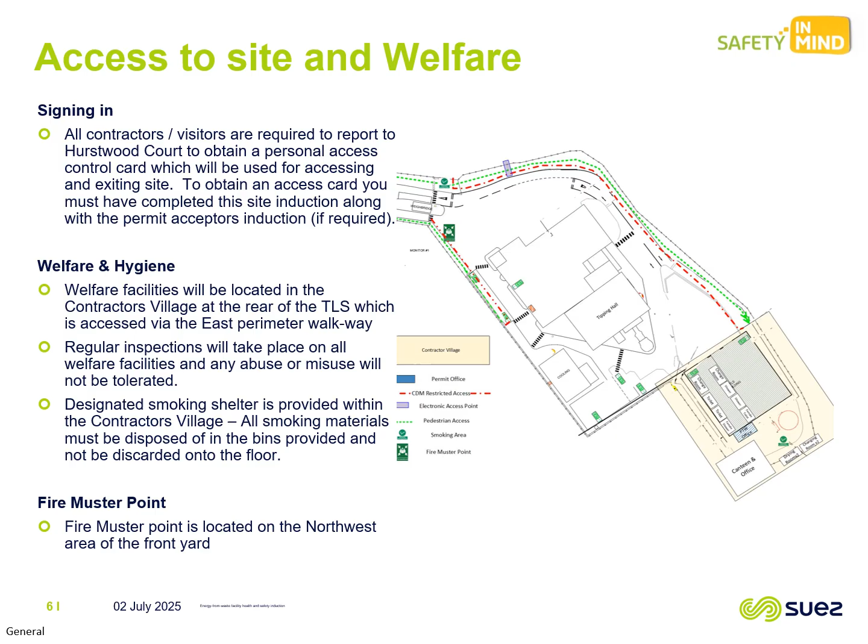Fire muster point. The fire muster point is located at the northwest area of the front yard.

Welfare and hygiene. Toilets can be found in the contractor's village within the TLS. If you need directions, please do not hesitate to ask. Please use the walkways provided. Disabled accessible toilets can be found within the TLS.

Please ensure that you wash your hands in the facilities provided after visiting the plant. Please ensure you wash your hands before eating, drinking or smoking. The containment of litter is of vital importance to protect our environment and control pests. Please use the bins provided around the site.

Driving and parking. Reverse parking is required on site. You must park in marked bays or designated areas as directed by Suez site staff only. All vehicles must display a contact phone number when parked on site. Parking on site is reserved for Suez staff and contractor supervisors only.

Off-site parking. Parking on site during shutdown is restricted. Off-site parking is available at Salford Road, Over Hulton, Bolton, BL5 1DG, where a transfer back and forth from site will be provided.

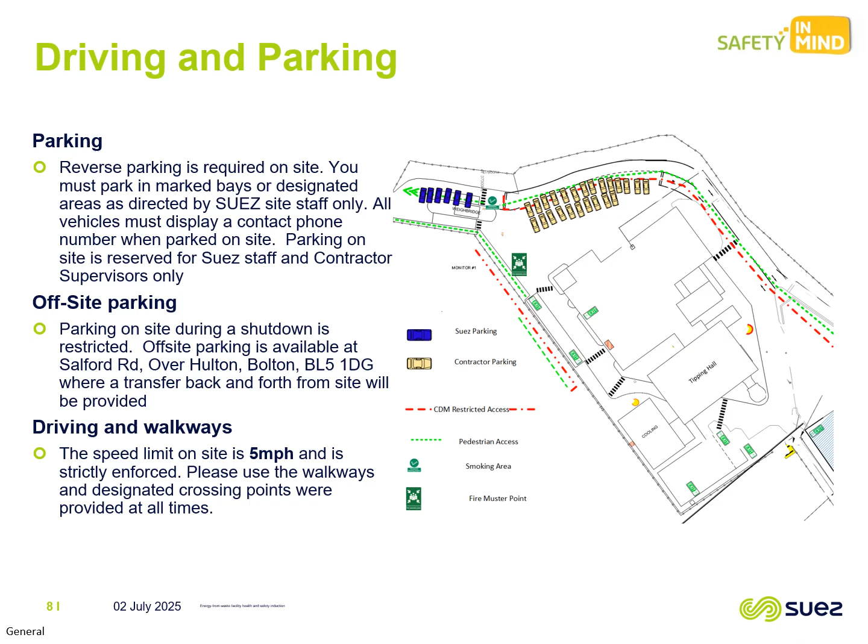Driving and walkways. The speed limit on site is 5 miles per hour and is strictly enforced. Please use the walkways and designated crossing points where provided at all times.

Disability and health conditions. If you are blind or partially sighted, hearing impaired or mobility impaired, please inform reception to make us fully aware. This will enable us to assist you further and ensure that any additional controls required are put in place. If you have health conditions which could affect you whilst on plant, please inform your Suez host. Conditions could include pacemaker, vertigo and joint pain.

Personal protective equipment, or PPE, is required on site or plant once you enter the PPE zone. The minimum PPE required is as follows: hard hat, safety glasses, safety footwear, high-vis vest or jacket, and safety gloves.

Additional personal protective equipment may be required depending on your risk assessment and method statement. All abrasive wheel work requires a full face visor and RPE face mask rated to at least FFP2.

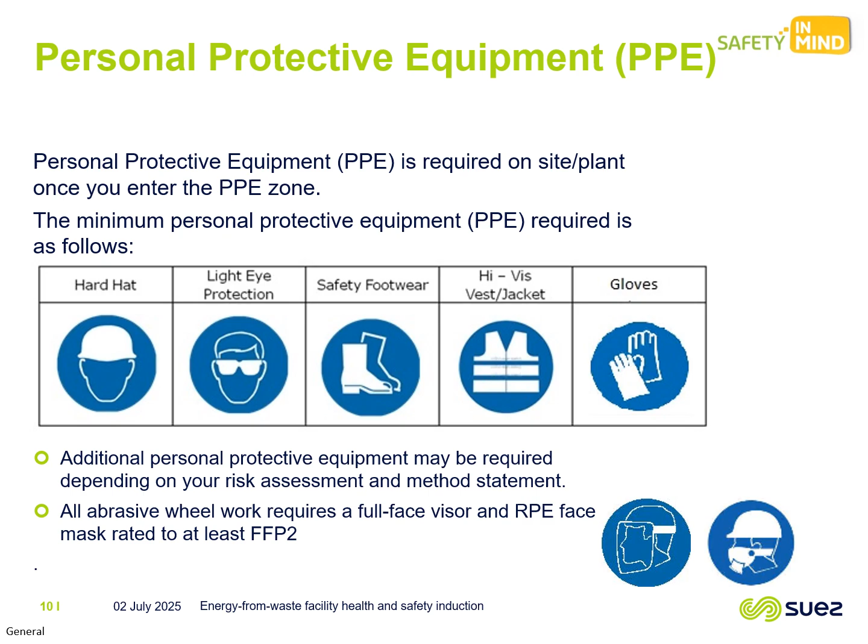Fire procedures. In the event of a fire, raise the alarm by activating the nearest call point. Leave by the nearest safe exit route and walk towards the fire assembly point. Dial 999 or 112.

Fire assembly point: the assembly point for all personnel on site is located adjacent to the bike shed on the front yard. Fire alarm test: at this site, the fire alarm is tested weekly every Thursday at 11 AM.

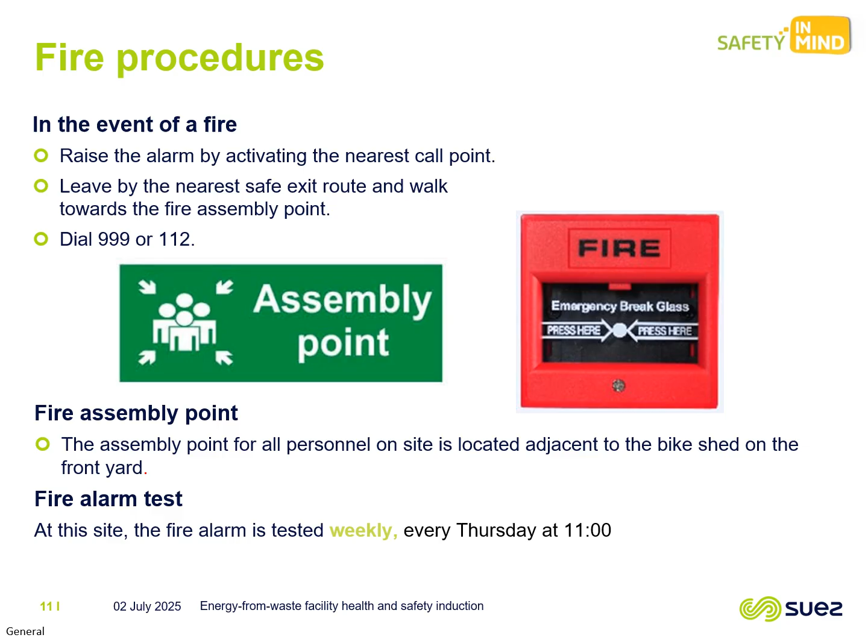Smoking and antisocial behaviour. Smoking is only permitted in the designated areas. The smoking areas are located adjacent to the weighbridge and the contractor's village. E-cigarettes come under the same rules as normal cigarettes, and the smoking area must be used. All smoking materials must be disposed of in the bins provided and not discarded on the floor.

Violence, bullying, drugs and alcohol. We have a strict policy on the use of drugs and alcohol at work. You will be removed from site, and if you are suspected or found to be under the influence, you may not be allowed back. Violence and bullying will not be tolerated.

First aid. This site's first aiders are listed on posters displayed around the facility. Ask a member of staff if you require first aid. Eye wash stations are located around the facility. First aid boxes are available throughout the facility. AED units are in the Permit Office and Hurstwood Court.

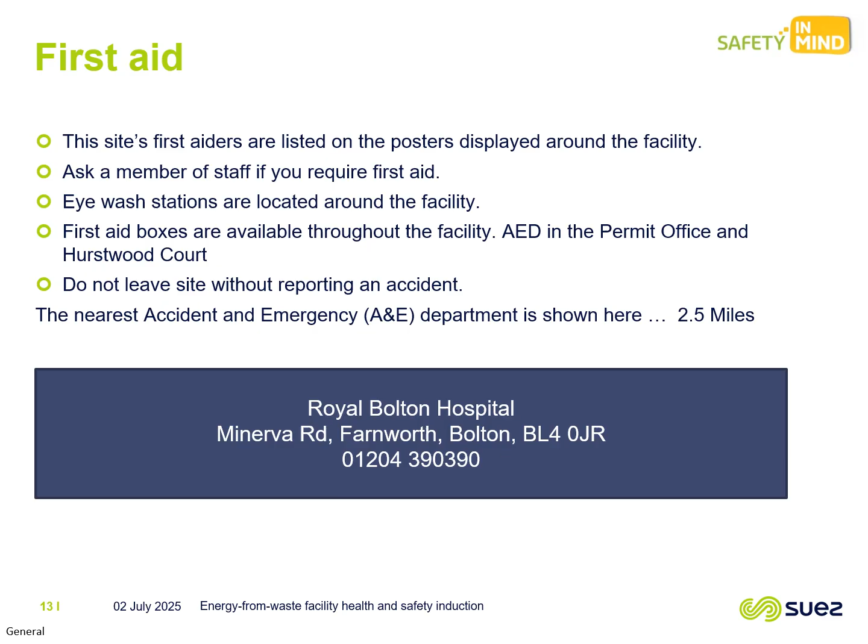Do not leave site without reporting an accident. The nearest accident and emergency A&E department is as shown here, 2.5 miles away: Royal Bolton Hospital, Minerva Road, Farnworth, Bolton, BL4 0JR. 01204 390 390.

Accident reporting. An accident is an unplanned event which resulted in an injury, harm or damage. All accidents and incidents must be reported to an employee on site and recorded in the accident book. Certain events must be reported under RIDDOR, where your full cooperation is required.

A near miss is an incident that did not result in injury or damage but had the potential to do so. We record all near miss incidents, investigate them and put appropriate actions in place to prevent a reoccurrence. Please report all near misses using the forms provided and hand them to an employee on site.

Permit to work. A permit to work is required for all contractor work. Permits are available from the Permit Office located in the contractor's village. Your permit must be displayed or available at your place of work. A permit to work will only be issued when a relevant risk assessment and method statement have been produced.

For certain tasks, certification may be required before a permit is issued. Anyone leaving site without closing out a relevant permit or not abiding by the controls listed on the permit may be issued with an infringement notice. An infringement notice may stop you from working on our sites in the future.

All persons accepting permits on behalf of themselves and their team will be required to undertake an additional permit acceptors induction and questionnaire. When all works are finished, a post-workplace inspection must be carried out before the permit can be completed and signed off.

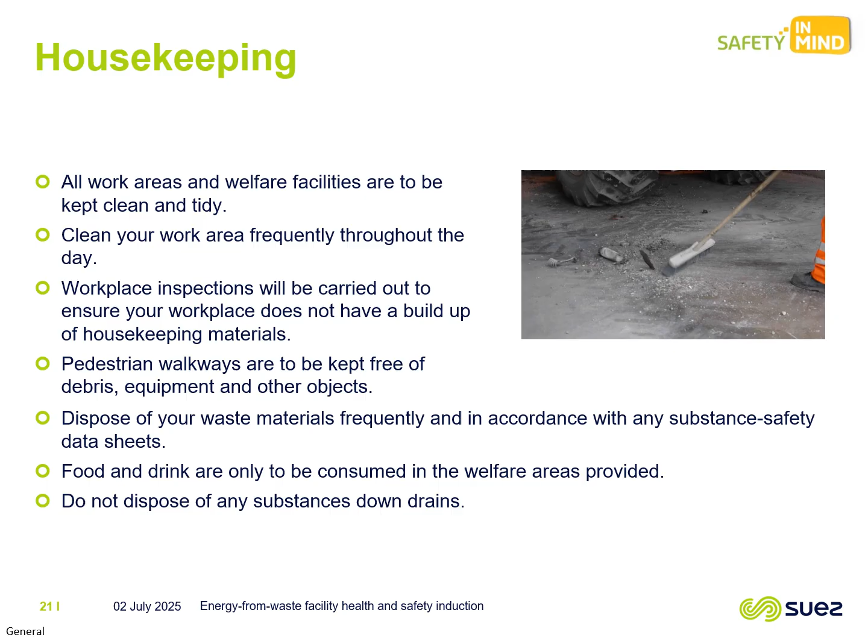Housekeeping. All work areas and welfare facilities are to be kept clean and tidy. Clean your work area frequently and throughout the day. Workplace inspections will be carried out to ensure your workplace does not have a build-up of housekeeping materials. Pedestrian walkways are to be kept free from debris, equipment and other objects. Dispose of your waste materials frequently and in accordance with any substance safety data sheets. Food and drink are only to be consumed in the welfare areas provided. Do not dispose of any substances down drains.

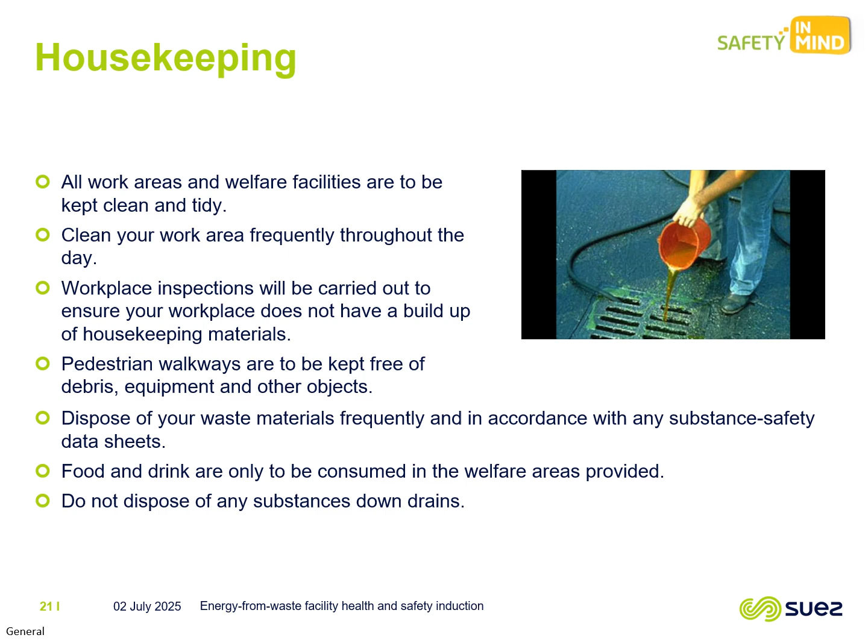Scaffolding. Scaffolding requirements. Please inform the Permit Office of any requirements. Scaffolding modifications are only permitted by qualified and authorised persons. Never take it upon yourself to modify or remove scaffolding.

Scaffold access. When accessing scaffolding, always ensure that there is a valid scaff tag in place. Scaffolding is inspected every 7 days. If there is a do-not-use scaff tag or an out of date tag, report this to the Permit Office and do not use it.

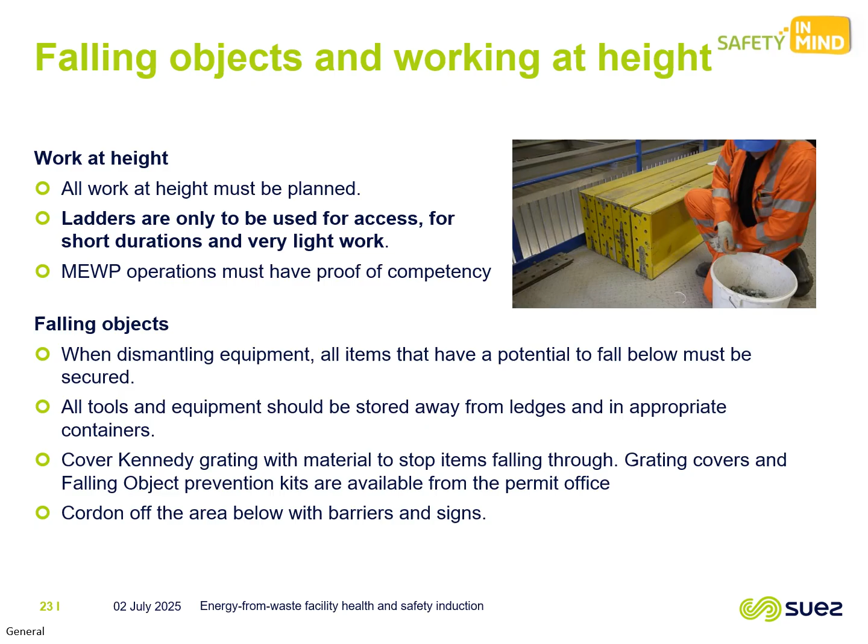Falling objects and working at height. Work at height must be planned. Ladders are only to be used for access for short durations and very light work. MEWP operators must have proof of competency.

Falling objects. When dismantling equipment, all items that have potential to fall below must be secured. All tools and equipment should be stored away from ledges and in appropriate containers. Cover gratings with material to stop items falling through. Grating covers and falling object prevention kits are available from the Permit Office. Cordon off the area below with barriers and signs.

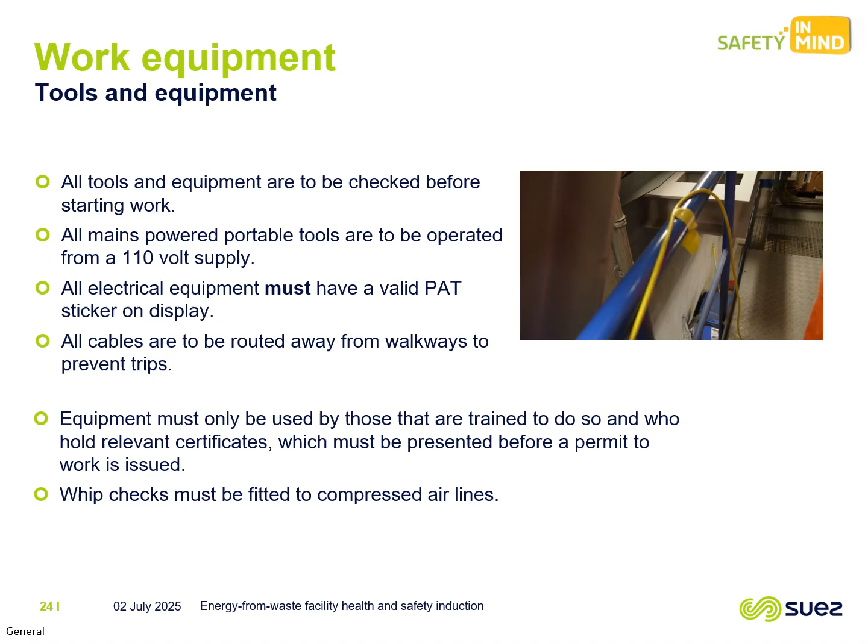Work equipment. Tools and equipment. All tools and equipment are to be checked before starting work. All mains powered portable tools are to be operated from a 110-volt supply. All electrical equipment must have a valid PAT test sticker on display. All cables are to be routed away from walkways to prevent trips.

Equipment must only be used by those trained to do so and who hold relevant certificates, which must be presented before a permit to work is issued. Whip checks must be fitted to compressed air lines.

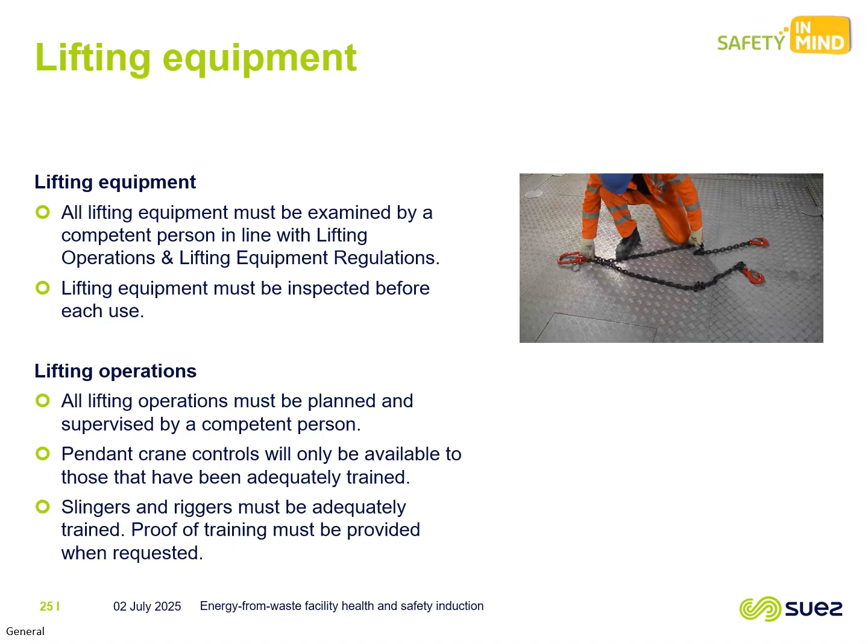Lifting equipment. All lifting equipment must be examined by a competent person in line with the Lifting Operations and Lifting Equipment Regulations. Lifting equipment must be inspected before each use.

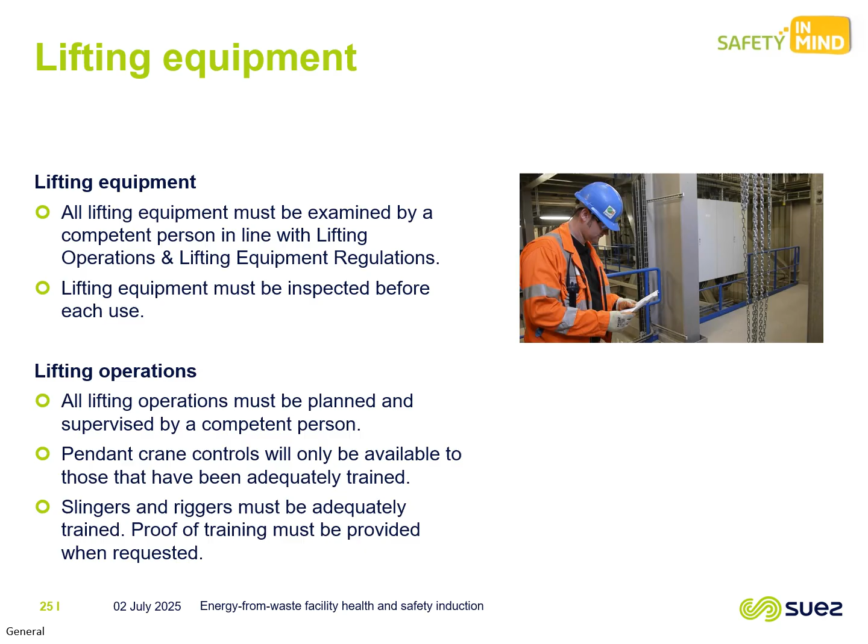Lifting operations. All lifting operations must be planned and supervised by a competent person. Pendant crane controls will only be available to those with adequate training. Slingers and riggers must be adequately trained, and proof of training must be provided when requested.

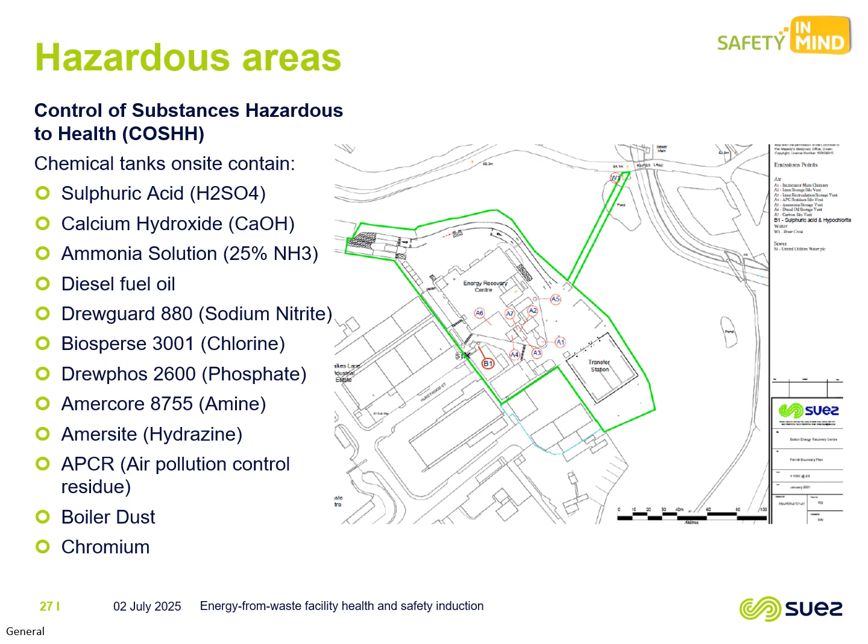Chemical tanks on site contain sulfuric acid, calcium hydroxide, ammonia solution 25%, diesel fuel oil, Drewguard 880, sodium nitrite, Biosperse 3001, chlorine, Drewphos 2600, phosphate, Amercore 8755, amine, Amersite which is hydrazine, APCR, air pollution control residue, boiler dust, and chromium.

Hazardous substances from work activities. Hexavalent chromium. Exposure causes adverse health effects including occupational asthma, eye irritation and damage, perforated eardrums, skin irritation, respiratory irritation, kidney damage, liver damage, nose irritation and damage, and respiratory cancer.

It can form when performing hot work such as welding on stainless steel. The high temperature involved in this process results in oxidation that converts the chromium to a hexavalent state. Therefore, those welding or grinding stainless steel are at particular risk.

If you identify a suspicious deposit, avoid contact, make sure you do not disturb it, and report it immediately to your site contact. Field test kits are available. If confirmed as hexavalent chromium, cleanup is typically carried out by a specialist contractor. Yellow deposits in the colder stages of a HRSG are usually sulfur, but if in doubt, have these checked.